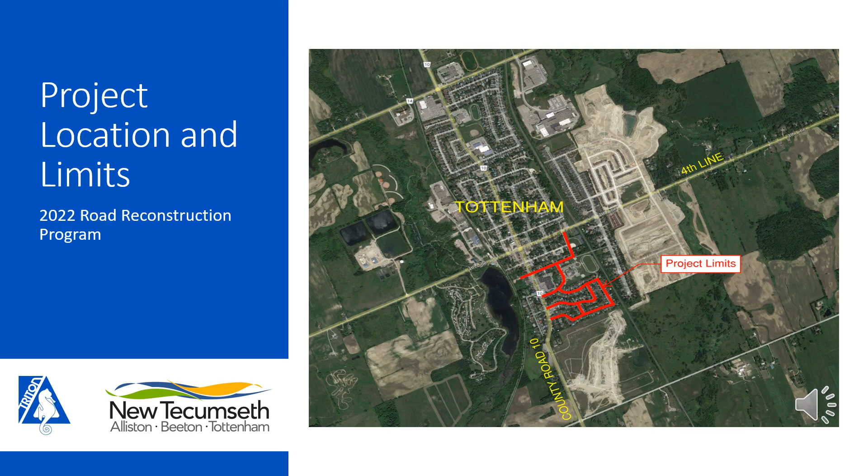The project is located on 7 local streets within the community of Tottenham. The streets include Brown Street, William Smart Road, Lionel Stone Avenue, Adeline Avenue, Rogers Road, Delane Street East, and Keogh Street. The subdivision was originally constructed in the 1970s, and the streets are in poor condition with severe cracking, rutting, heaving, and broken curbs. The town of New Tecumseh's 2018 Road Needs Study update, completed by R.J. Burnside and Associates Limited, has identified these roads as a now need for reconstruction. The link to the Road Needs Study is included on this slide.

Some operational issues have been identified with the sanitary and storm sewer networks, and not all streets currently have a sidewalk. The project goals include reconstructing the deficient road base, the repair or replacement of sewers to mitigate existing operational issues, and to construct a sidewalk on one or both sides of each street. The streets will also be improved to current town standard cross sections.

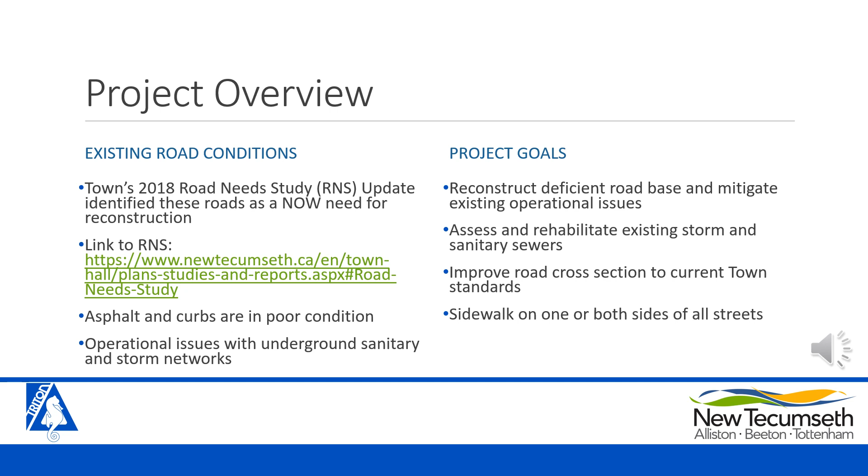A resident survey was delivered to all residents within the project limits to obtain feedback on various items and provide an opportunity for residents to comment on current issues and concerns within the existing subdivision. A frequently asked questions sheet was also appended to this document to provide general information on the upcoming construction work. The results of the survey that have been received as of September 6th are included in subsequent slides. Generally, the results indicated the sidewalk connectivity and active transportation needed improvement, and the street lighting and stormwater drainage were good to adequate. These results are illustrated on pie charts in subsequent slides.

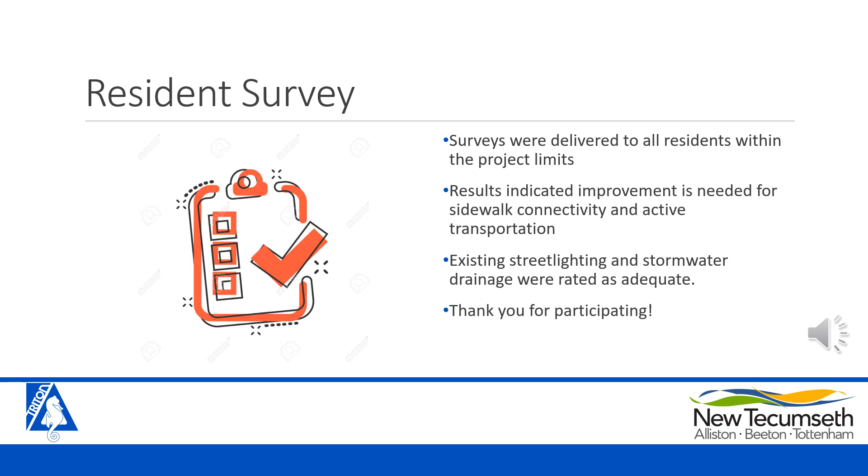Thanks to all who participated in the survey. The survey results and feedback are beneficial for the success of this project. All comments received as part of the resident survey were reviewed and are being taken into consideration. The major concerns are listed on the slide and include protection of private features like fences, retaining walls, gardens, and trees, the brightness of existing streetlights, the poor condition of existing roadways, and concerns with the impacts of the proposed sidewalk on parking within the subdivision.

Tree removals will be required to facilitate the construction and are discussed in detail on the subsequent slide. One design goal was to minimize the amount of tree removals while still providing the town standard cross-section. The street lighting is proposed to be replaced, and the photometric design is currently underway. The lighting will be dark sky friendly and include back shields to mitigate the encroachment of lighting into private property. The roads are in poor condition and will be reconstructed on each street.

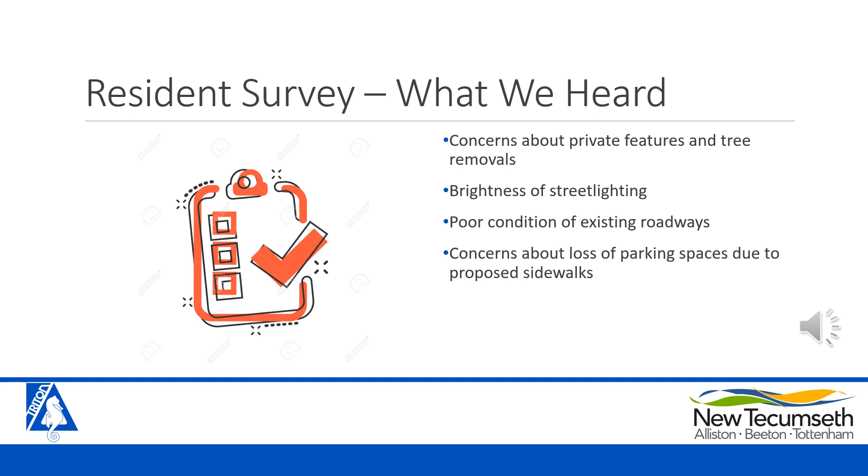One of the goals of the project was to construct a sidewalk on one side of each street. The subdivision was carefully reviewed and the sidewalk location was selected in consideration of tree removals, loss of parking, conflicts with utilities, connectivity with parks, schools, and other sidewalks, town standards, and best practices. The town standard cross-section was applied to all streets with some minor changes due to property constraints, existing infrastructure and underground utilities, and in consideration of impacts to private property.

Generally, this includes a 7.7 meter wide asphalt road, 0.6 meter wide concrete curb and gutter on both sides of the street, a 1.5 meter wide sidewalk on one side of the street, and street lighting. The asphalt width on Rogers Road will be maintained at 8.5 meters to provide additional width for school buses accessing Tottenham Public School and truck deliveries to the Tottenham Mall. The asphalt width on Keogh Street will be less than town standard with 6.5 meter asphalt width due to the narrow right-of-way width and constraints with the hydro pole line. The 2 existing sidewalks on Lionel Stone Avenue will also be retained where they currently are located.

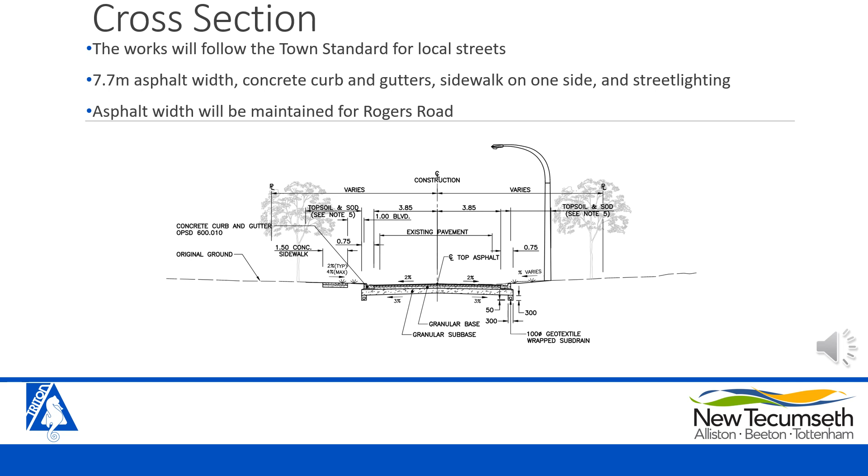The typical cross sections are included in the posted drawing set. The resident survey included a rating for sidewalk connectivity within the subdivision with respect to connections to schools, parks, trailways, and adjacent streets, and a rating for active transportation with respect to sidewalks, trails, and pedestrian crossings.

Where there is currently no sidewalk, both sides of the street were thoroughly assessed to determine the sidewalk location that would minimize conflicts, provide system connectivity with other sidewalks and paths, reduce tree removals, and provide as close to the town standard as possible. Considerations included conflicts with trees, existing utility infrastructure, providing a boulevard between the sidewalk and curb for snow storage, and grading and property constraints. The proposed sidewalk locations maintain a minimum of 2 parking spaces in accordance with the town zoning bylaw.

Concrete sidewalks are proposed to be constructed on at least one side of each street. The proposed sidewalks will be 1.5 meters wide in accordance with town standards and the Accessibility for Ontarians with Disabilities Act, except where curb-face sidewalk is proposed due to constraints within the town's right-of-way. In these locations, a wider 1.8-meter wide curb-face sidewalk is proposed to provide more width adjacent to the roadway in accordance with best practices.

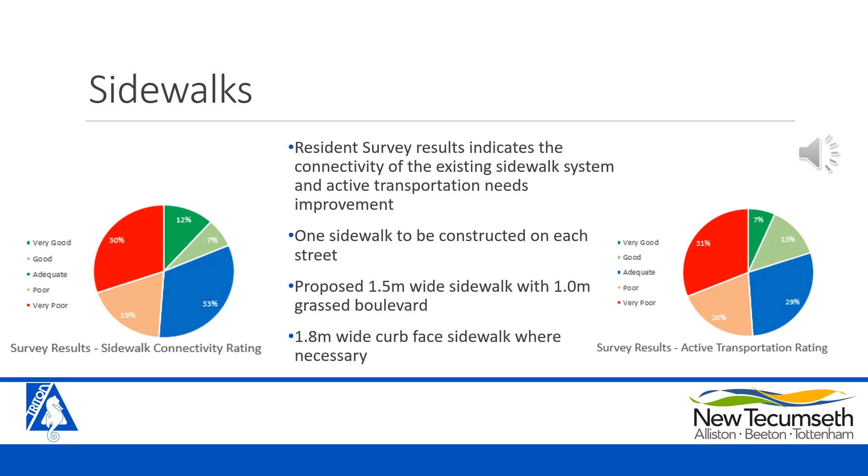The posted design drawings show the proposed sidewalk location in pink color. Where there is existing sidewalk, the proposed sidewalk will remain in the same location but improved to standard widths.

A closed-circuit television or CCTV investigation was undertaken for all storm and sanitary sewers within the project limits. This was undertaken to assess the existing condition and determine a rehabilitation and repair plan for all sewers. In general, the sewers are in good condition. The results of the resident survey also indicate that the existing storm drainage system is working in a good to adequate manner.

Where there is calcite buildup in a sewer, like shown on the picture on the left on this slide, an in-situ repair will be undertaken that will include grinding the calcite and installing a liner on the inside of the sewer. This will prevent future groundwater from leaking into the sewer that causes the calcite buildups. Other sections of sewer have more severe defects or have failed, as shown in the picture on the right. These sections of sewers will be replaced. The proposed sewer treatments are shown on the posted design plans in color.

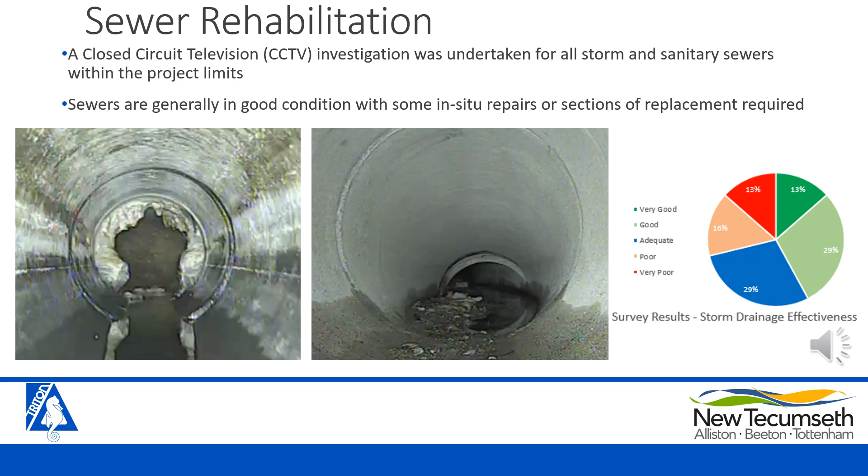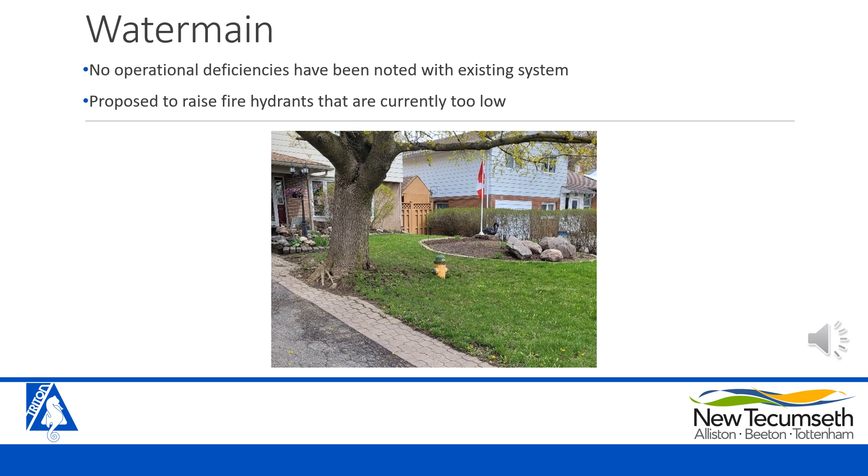There were no noted operational deficiencies with the water main or water servicing. There are a few fire hydrants that are too low compared to the adjacent ground and some hydrants that do not have a shutoff valve. These hydrants will be raised or replaced as necessary.

Each driveway was carefully reviewed and considered during the vertical profile design. If the road cross-section and profile adjustments were causing too steep of a driveway grade, the profile was revised to alleviate this issue. Due to the improved road cross-sections, many driveway grades had to be adjusted from the existing conditions in order to tie into the existing entrance at property line. Where it was not possible to tie in at property line without increasing the grade above the town maximum standard of 7%, the driveway grading was taken beyond property line.

In some cases where the grade exceeds 7%, efforts were made to minimize the grade change from existing condition where feasible. If grading is required beyond property line, the town will circulate a permission to grade letter to affected property owners prior to construction for permission.

The posted drawings show a plan view of each entrance and include color to illustrate what material will be placed for each entrance. Gray is used for asphalt, tan is used for gravel, and pink is used for concrete and concrete pavers. All driveways will be reconstructed with materials to match existing. Interlock paving stones will be salvaged, stored, and replaced. Gravel driveways will be paved with asphalt within the town's right-of-way.

If an entrance requires grading beyond property line, the material placed beyond property line will match the existing material of the entrance. Driveway widths will match existing where it meets town standards. Driveways that are currently wider than town standard maximums without an approved permit may be reinstated to the town maximum

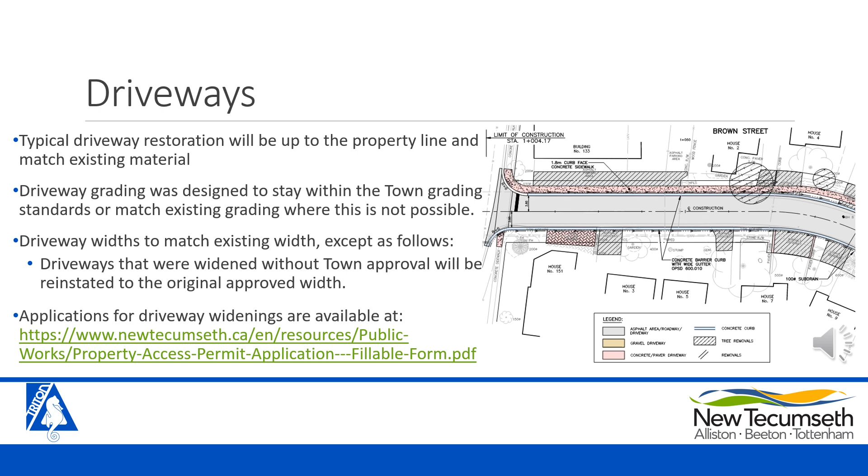standard. The zoning bylaw allows for a driveway width up to 50% of the lot frontage to a maximum of 6 meters. Any non-conforming driveway width may apply for approval prior to the roadworks being undertaken. The application form for a driveway widening can be found at the link shown on this slide.

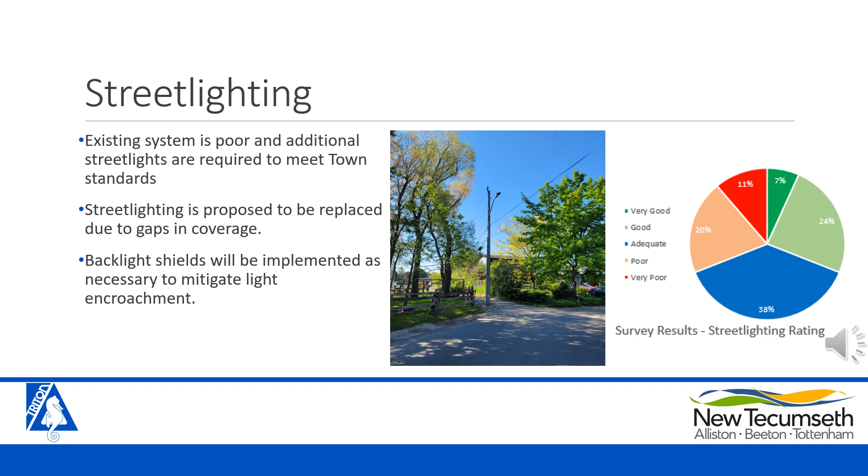A photometric analysis of the existing street lighting system was undertaken and the results showed the existing system is poor with numerous gaps and deficient lighting levels. The results of the resident survey also indicate that the existing street lighting system is not working in an adequate manner. The streetlights are proposed to be replaced to meet current town standards. The proposed street lighting will include features to mitigate light encroachment into private property, including dark sky-friendly luminaires and backshields.

A detailed inventory and arborist report was completed for all trees that are 100 millimeters diameter at breast height or larger within the project limits and 6 meters beyond the right-of-way. Each tree was reviewed to determine if the proposed design and grading limits were in conflict with the tree protection zone. Each tree in conflict was reviewed further to see if it had to be removed or if it could remain with tree protection fencing being installed around it during construction. The tree removal locations are included on the drawings.

Shared trees are when the trunk is located on property line. Shared and private trees that are currently proposed to be removed are being reviewed further to determine if options are available for the tree to remain or if construction operations can be altered for careful excavation around the roots to mitigate damage to the trees. Notice will be provided and consultation will be held with property owners if a privately owned or shared tree is proposed to be removed.

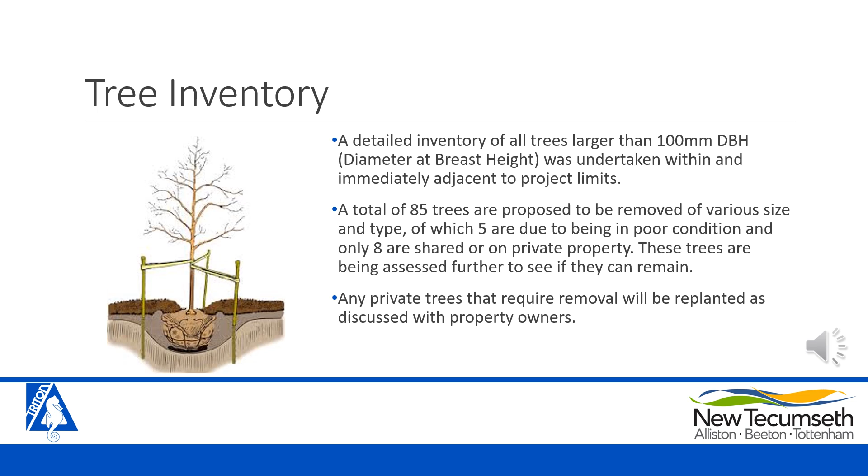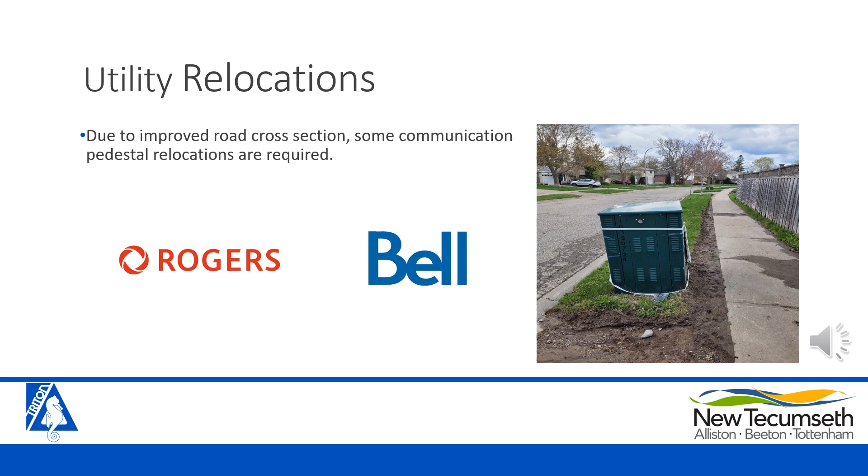During the design process, conflicts were identified with Bell and Rogers pedestals due to the improved road cross-section. Discussions have begun with the utility companies regarding these relocations and are anticipated to be completed prior to the road construction work. Notice should be provided by utility companies if any of the relocations require service disruptions. During utility relocations, there will be flags and paint identifying the location of all underground infrastructure.

Construction is anticipated to begin in 2024 with Rogers Road pending budget approvals. The remaining streets will be completed in following years pending budget approvals. Phasing of the work is still being determined, but it is expected that the work will be completed over multiple construction seasons. Additional construction notice will be provided once timing and phasing and a contractor have been confirmed. The streets will be closed during construction. Although the road will be closed, local traffic for residents and emergency vehicles will be maintained.

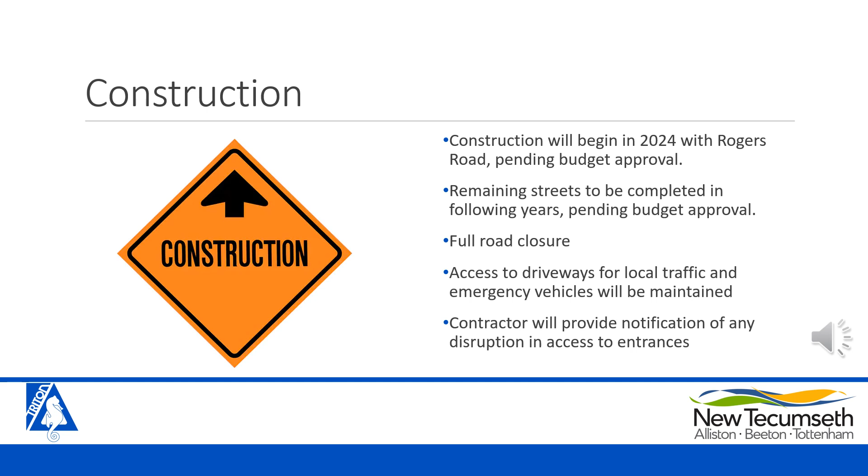Access to your entrance will be disrupted when the contractor is constructing the new entrance, pouring concrete curb and sidewalks in front of your entrance, and excavating the new road in front of your entrance. These disturbances will be kept to a minimum time required, and the contractor will notify you beforehand to make arrangements for anyone that needs access. Simcoe County waste collection services will be maintained throughout the duration of construction. The impacts of the construction on the school bus route are being coordinated with the School Board Transportation Consortium. Additional details will be provided to residents prior to construction.

The next steps in the project include daylighting utilities at certain locations and preparing for construction. The daylighting of utilities will occur to confirm the location and depths of existing infrastructure at locations of potential conflicts and is anticipated to occur in the coming weeks. This will involve a vac truck creating a hole to expose the infrastructure and allow for measurements to be taken. The holes will be backfilled immediately.